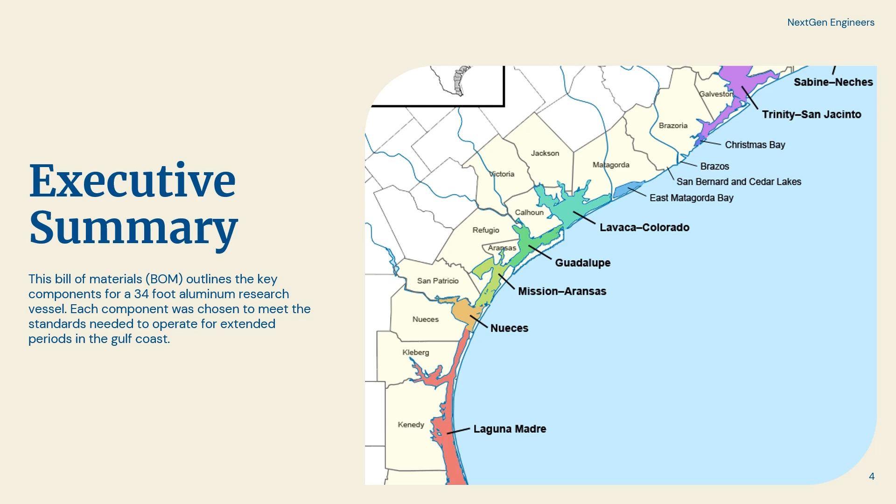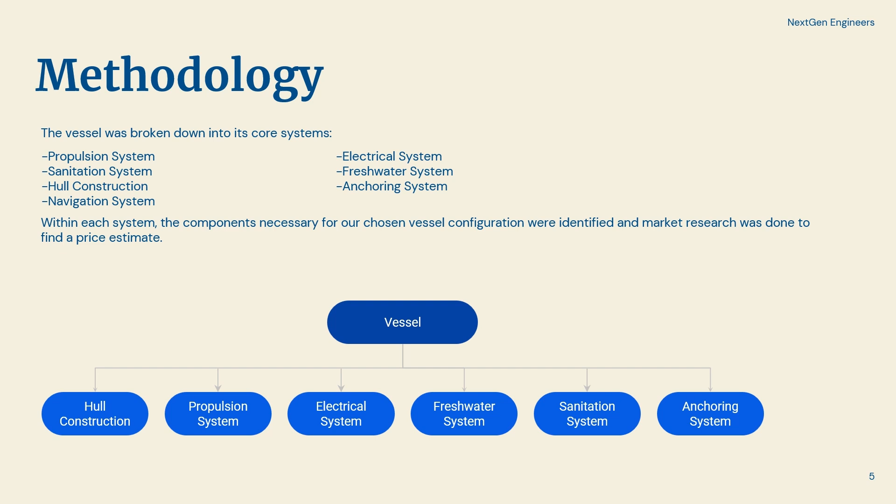To help split up the research, we broke down the vessel into its core subsystems: propulsion, electrical, sanitation, freshwater, the hull construction itself, the anchoring system, and the navigation system. In each system, we identify the core components, which gives us an estimate for the total cost for each individual system, which we can add up at the end to get an estimate for the total cost of our vessel.

For our hull construction, we used a rough estimate that 50% of the total vessel weight will come from the hull and deck, and given that for our specific vessel configuration, the average weight tends to be around 8,000 pounds, this gives us a rough estimate of how much raw aluminum we need, around 4,000 pounds.

We identified two main aluminum alloys that will be effective for the marine environment, aluminum 5086 and aluminum 6061. Aluminum 5086 is a little bit more malleable, so it will be used for the plating and the deck, while aluminum 6061 is a little bit more stiff and strong, so it will be used for the structural framing of the vessel.

Aside from the aluminum, the hull will need some kind of anti-fouling paint, which protects the wetted area of the vessel. We also need sealant, sacrificial anodes to protect from galvanic corrosion, and some kind of anti-slip epoxy for the deck, as well as a properly sized rudder for our 34-foot vessel.

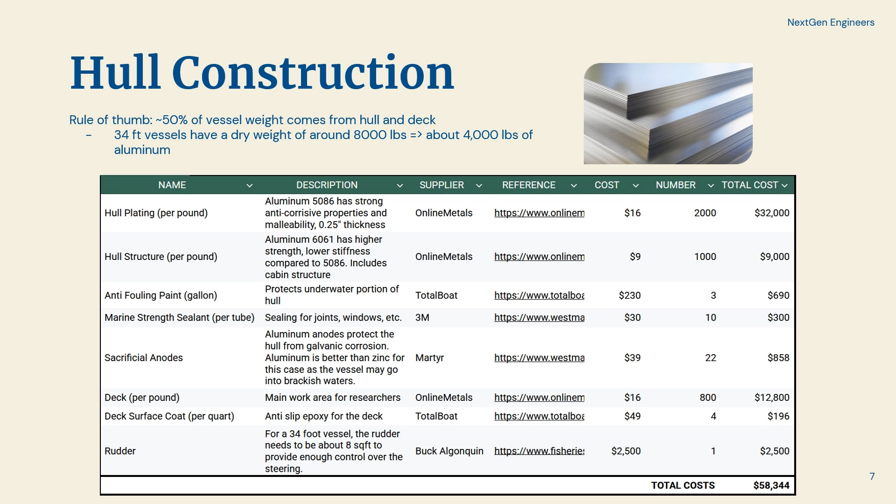The key component for the propulsion system is of course the engine, which needs to be large enough to propel our vessel, which should be around 8 to 9,000 pounds. We identified that an engine of around 380 horsepower should work well for our configuration. We also saw that keeping the same supplier for the different components ensures that the components are all compatible with each other.

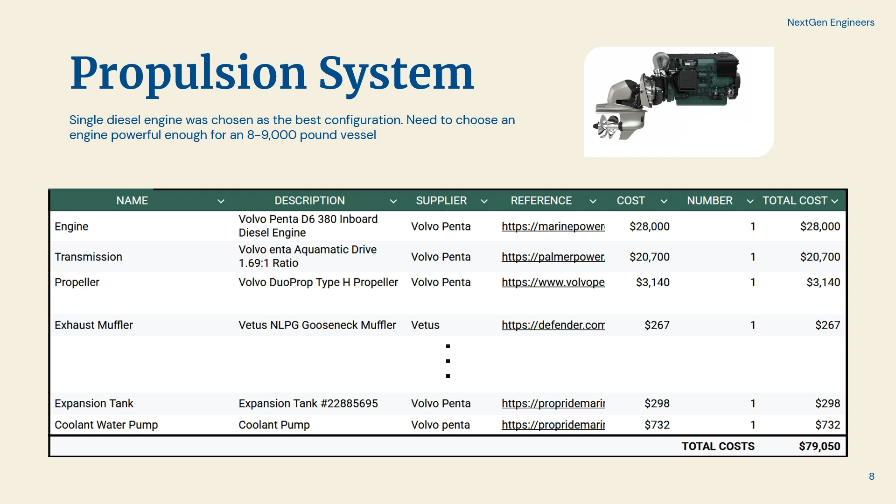For our vessel navigation equipment, we decided to focus on precision, ease of use, and safety. Our system includes a variety of equipment such as a high accuracy compass, joystick steering, a chart plotter, and an autopilot system. This allows for precise tracking of the vessel location, which is a requirement when performing research on the coast, which might need some kind of surveying of the waters.

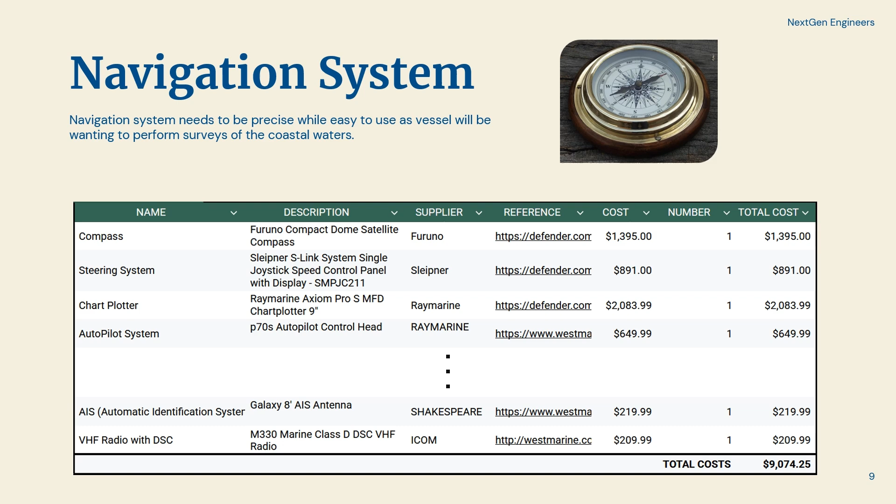For the electrical system, the biggest factor in choosing our components was reliability, as all the other subsystems are reliant on the electrical system, as well as the research equipment. Having a reliable, robust electrical system means that the vessel can actually function, and the way we identified to do this was to choose marine grade equipment that's built to stand the marine environment.

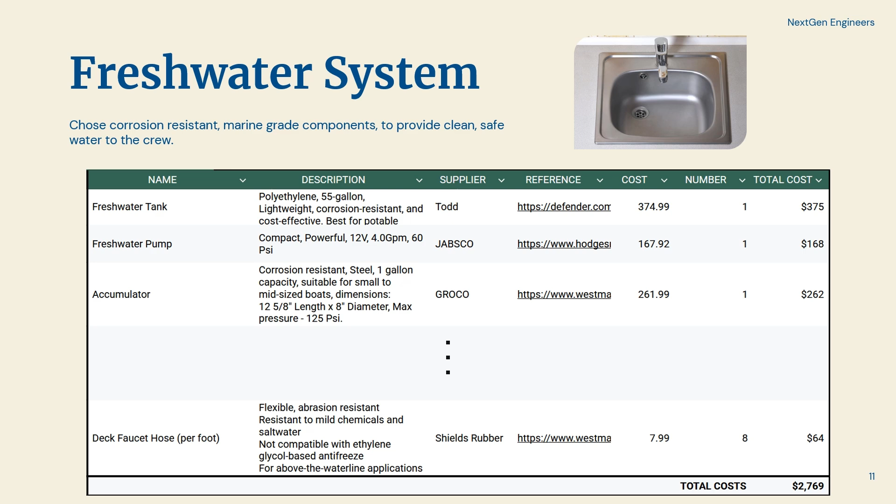Generally, when working with people, you need to provide clean, safe drinking water, so we need a system that can do that. Again, components are marine grade to maintain reliability and long-term performance. The system is designed to minimize pump cycling, provide steady water flow, conserve space, and ensure easy maintenance while delivering clean, safe water for drinking, washing, and showering.

For the sanitation system, like the other systems, we selected durable, corrosion-resistant components for the marine environment. The particular waste management system includes a macerator pump for easy discharge with a vented loop to prevent siphoning. These systems are designed to minimize maintenance, especially while out on the water, while maintaining high standards of hygiene and safety on the boat.

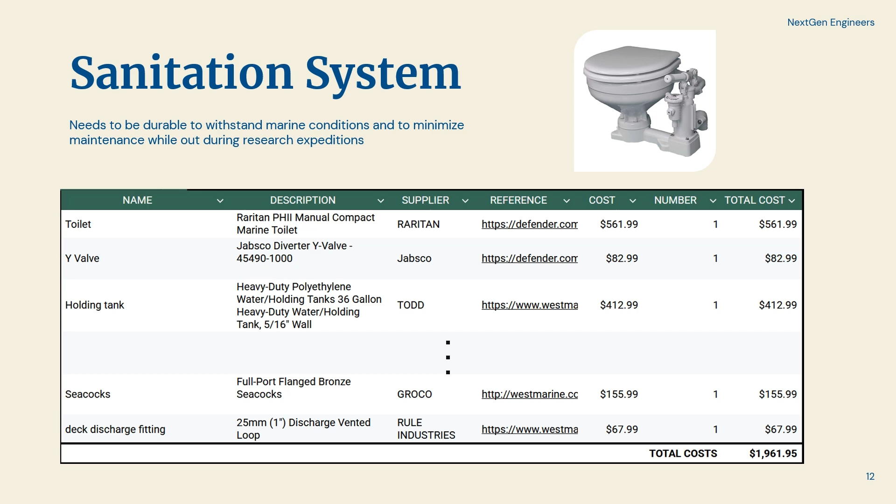The anchoring system was sized to the boat, as well as the conditions on the waters. Typically, we will have sandy soil on the Gulf Coast, so we want a fluke style anchor. Typically on the Gulf Coast we also have very shallow waters, so we size the chain according to the typical anchoring depth for the Gulf Coast, which we found to be around 25 feet.

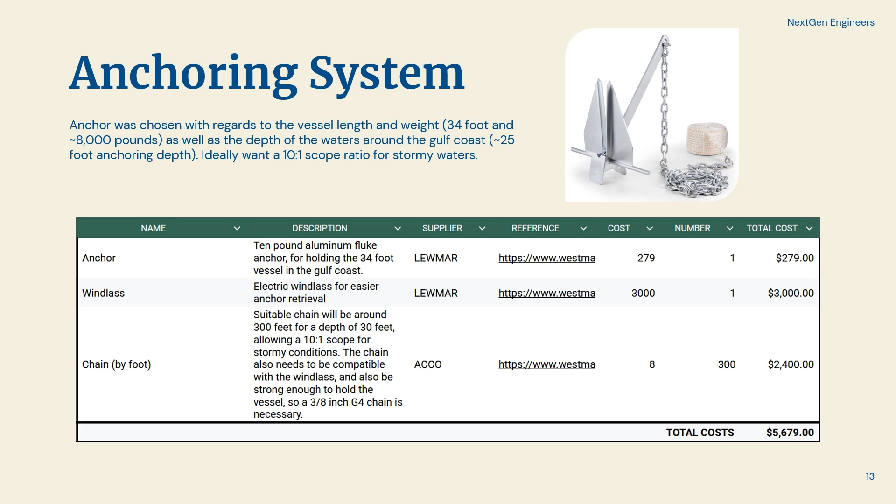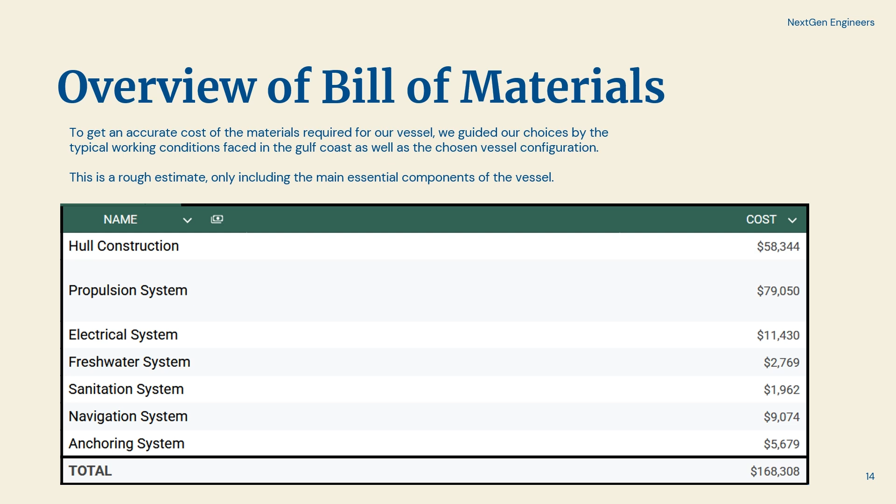Finally, adding up the individual systems gives us an overview of the overall bill of materials. While not an exhaustive list of the necessary components, this gives us a good estimate of the overall cost of the vessel, which, as we mentioned earlier, was a design factor in choosing our small configuration, while maintaining a similar performance to those that might be a little bit more costly.